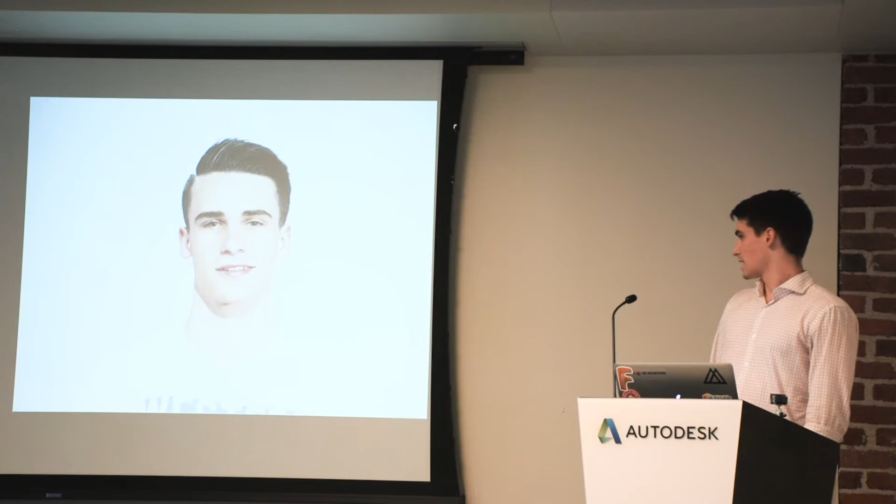Hey everyone, my name is Ben Lorimore, and I am currently a Fusion 360 intern at Autodesk up in Portland. I'm a rising sophomore at Western Washington University studying industrial design. Before I get into the Kickstarter, I just want to give you a little background of how I got to this point.

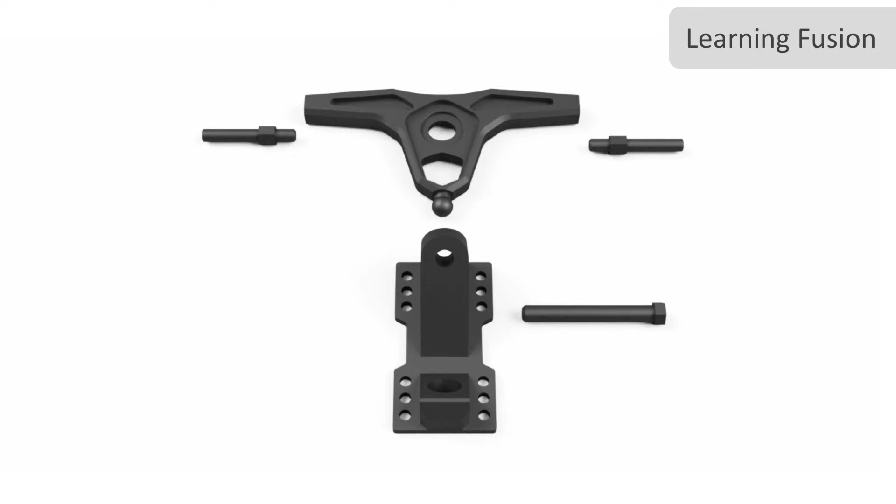I started using Fusion about halfway through my junior year of high school, and this is the first design I ever modeled. Anyone who uses Fusion can tell this is just a terrible model. For those who know CAD workflows, this is a bottom-up design, meaning I modeled all the parts on the plane and they're not connected. I didn't know how to use joints or any move commands, so that was the final stage for a while.

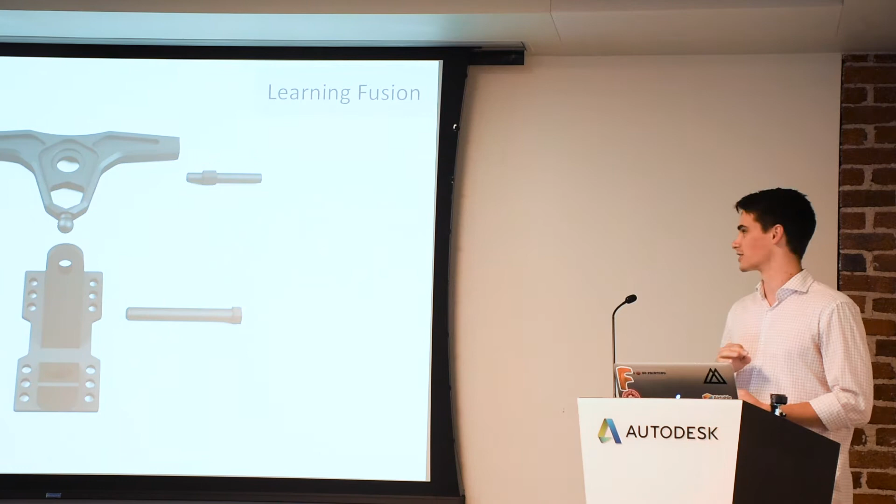I ended up 3D printing this, and since I didn't know how to measure anything—I was teaching myself CAD as I modeled this—none of the parts fit, because I used trigonometry to calculate and did some math wrong. It's funny, if I modeled this now it would probably take me 20 minutes and everything would be super precise and perfect, but this took me 3 months and it didn't even work. I ended up fixing it, and this is what the second 3D print turned out like, and this is a render of what it was supposed to look like the entire time.

My senior year of high school, I worked at this startup here in the Bay Area remotely called Orbis Wheels. Unfortunately I can't show any of my work because it's all non-disclosure. But during my time there, I gained a lot of experience, modeling in Fusion almost every day. I came in with still pretty beginner CAD knowledge and left feeling very confident in all solid body modeling and a lot of surface.

After my senior year, I really wanted some hands-on experience in a real industrial design internship. So I applied to a bunch of firms around Portland, and unfortunately I only heard back from one, which was Tarragon, a small soft goods firm. I stopped into Tarragon and spoke with the owner, Bill Dieter, and he said unfortunately they already filled their position, but they totally would have hired me if they hadn't.

He then gave me the best design advice anyone has ever given me, which is make something that you design. Up to this point, I'd drawn a bunch of my stuff and modeled it in Fusion extensively, and it's all constrained—like I can make it—but I'd never actually made it, besides a 3D print. A 3D print's cool, but it's not the same as actually having a real product in your hands. So I took this advice really seriously and began to brainstorm some things I could make.

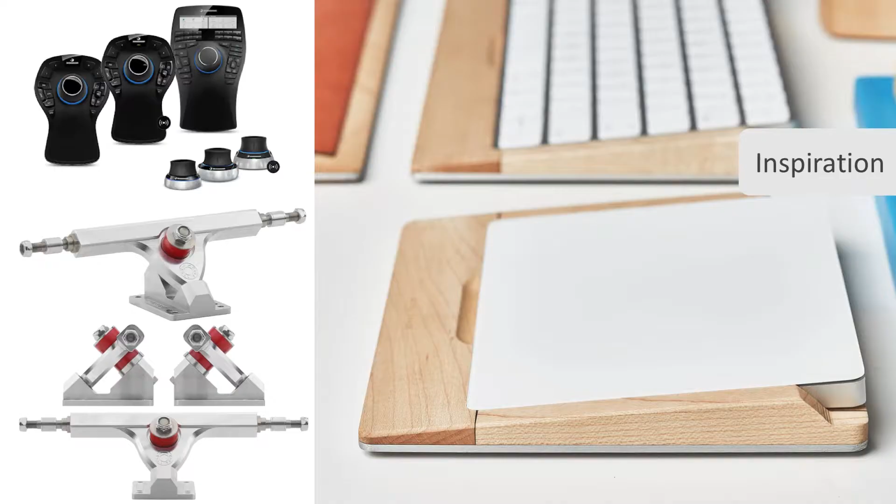It was funny because when I got the idea for the Space Cradle, it wasn't a logical ideation process—it just kind of hit me all at once. This is the inspiration for it. Obviously, the main inspiration comes from Grovemade. But I also use a 3D mouse every single time I use Fusion, and for those who don't know what a 3D mouse is, those are all 3D mice up in the top left corner.

And basically, it's not used to click at all. You can have some shortcuts programmed into it, but basically it's like a little knob and you use it to rotate, zoom, pan, all sorts of different commands. I think it speeds up my workflow like 200%. I can't even work in Fusion effectively without one anymore.

For those of you who work a lot in CAD, you know when you're working for like 5+ hours, you get really sore. So 3Dconnexion thought of that, and they made nicer ones, the top ones that have built-in hand rests and stuff, and a bunch of buttons for shortcuts, but those go for like $350 a piece. I have one of the ones down there which go for like $100, which I think is a good deal.

And the ones down there have a couple buttons, but I never use them at all. I wanted a hand rest so it could be more ergonomic, but I didn't even use the buttons. So I didn't really think it was worth spending like $200 for a hand rest when I was really paying for the buttons that I wouldn't even use.

And then right here, this is my last source of inspiration, which is Caliber longboard trucks. I used to longboard a lot. You'll see when I show you the design of the Space Cradle, but I really love the kind of curvy chamfers on that. This is CNC'd out of aluminum, and I just think the precision of those curves is really nice.

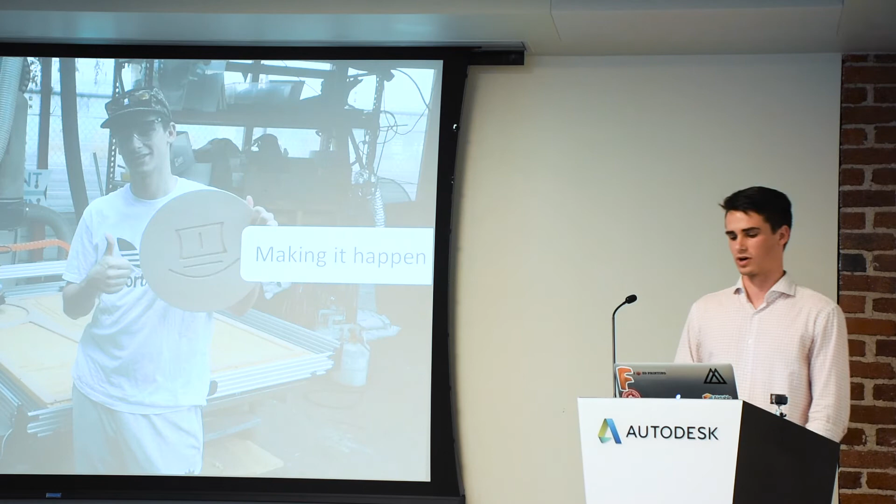And that's where Fusion really shined, I think. I was able to go into Fusion with no CAM or CNC experience whatsoever and basically teach myself everything. And as you'll see with the final results, I think it turned out pretty well. So I think that was really cool. It was really just easy to look at the little pop-ups and kind of find out what I needed to know.

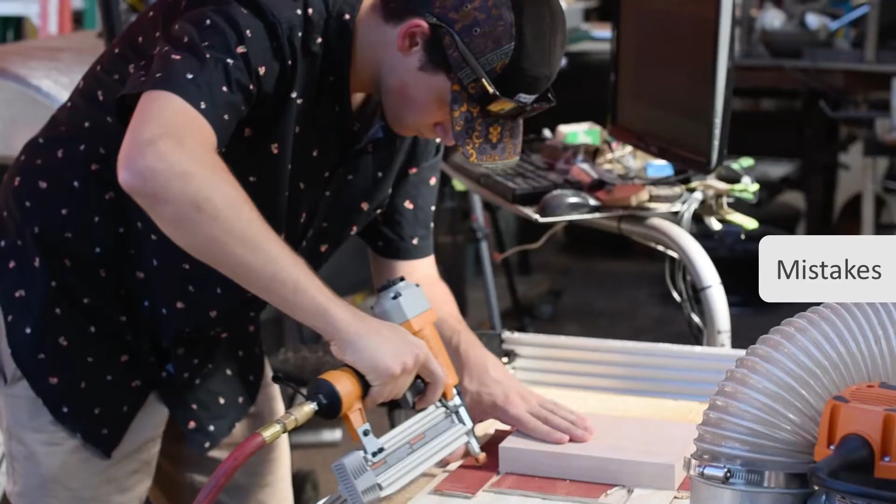With any workflow, I had some problems and mistakes that I could go back and change immediately. I think everyone with a real project will run into problems, but mine could have been avoided. My main mistake was trying to do everything at once - I'd never used CAM, never CNC'd, never made a product before, and I was trying to do all three plus launch a Kickstarter at the same time. If I did these in steps, I would have been more successful and less stressed. So to anyone thinking about doing something like this: do it in steps, it'll make it a lot easier.

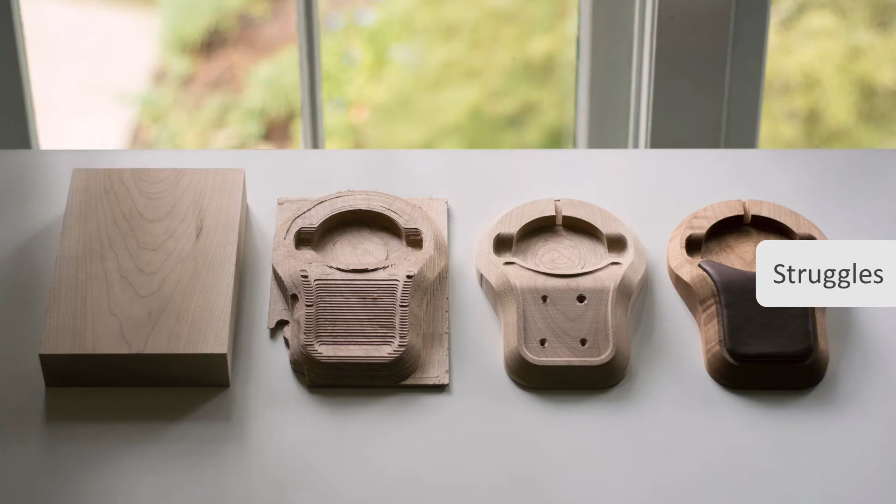I ran into two major problems. The first wasn't really related to making the Space Cradle itself. When I went to the makerspace, they told me the CNC had 3 inches of Z travel, meaning the bit can go up and down 3 inches. I thought, that's great, since the Space Cradle needed about 2.5 inches of Z. But once I drew up all the CAM and went to the CNC, I got error message after error message. I looked into it and found out it actually only had 2 inches of Z. I thought, well, I can't make this, I don't know what to do. But this ended up being really satisfying.

I found out the CNC was actually open source, so I found the Z plates online, pulled them into Fusion, added another inch, whipped up some CAM, got aluminum plates, and drilled it all out on the CNC itself. So I was modifying the CNC with itself, kind of like the self-replicating 3D printers, and I thought that was pretty cool.

Did you charge your makerspace for the upgrade? No. Did they give you a free month at least? I think I broke some of their bits, so it's kind of a trade-off.

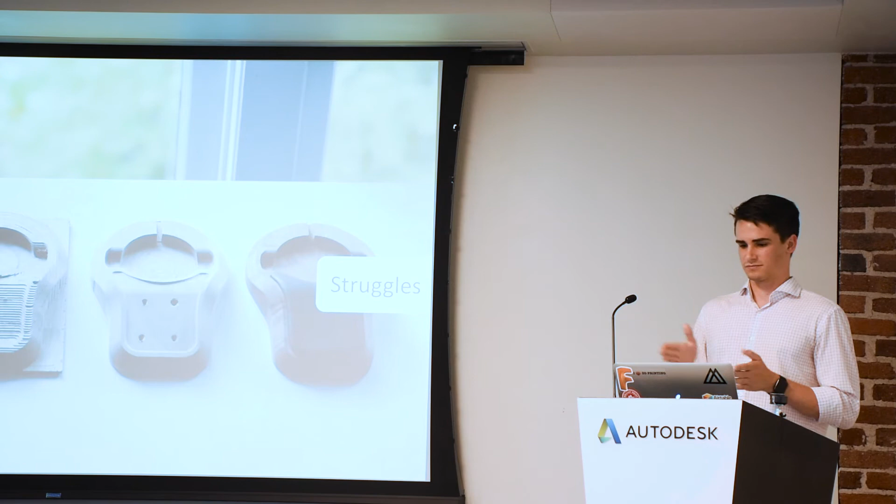The big problem I ran into with the Space Cradle itself was fixtures. I don't know how much CAM experience you guys have, but if you don't have any CNC experience, fixtures can be a really big problem, especially with a complex cut like this. The people at the makerspace were mainly cutting out just 2D stuff, so they could put bolts on the side and avoid the issue. But as you can see, that's the stock I start with on the left, and these are the steps to the final product. You can see I cut away the entire stock, so I can't just put a bolt in there because that's not going to work. I did a couple different things that were really hard and ended up not working, until at the very end I figured out I could just drill them in from the bottom. I never thought of that.

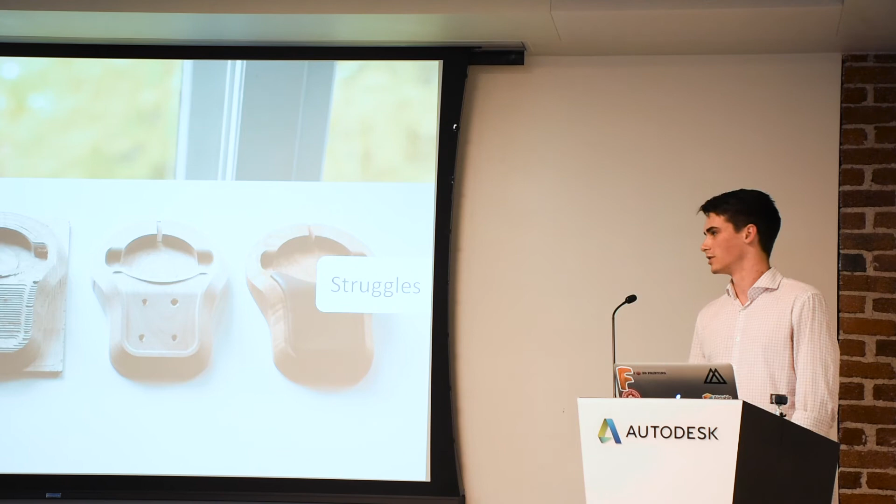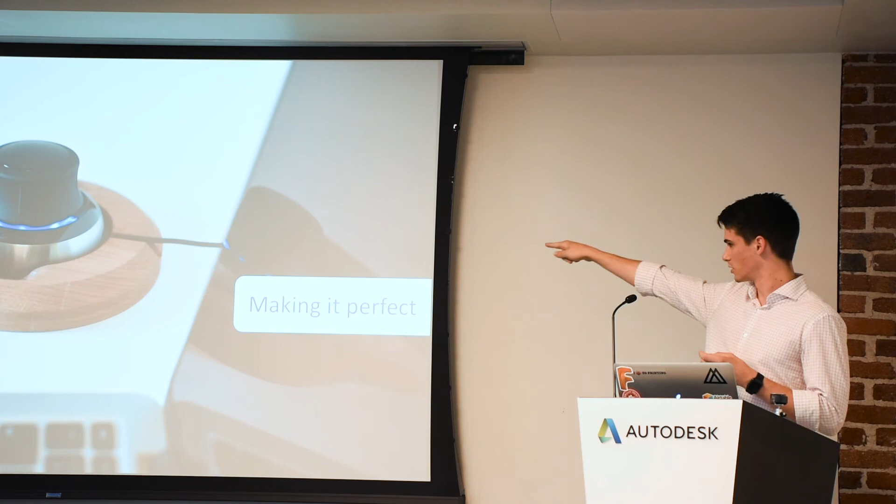Perfecting my toolpaths also took a lot of time - I think I went through 4 different iterations before it even looked good. But it was super nice because whenever I needed to make a change, I could just go into Fusion and change some geometry. For example, I needed to change the wire pocket because they didn't have the tool I thought they had, so I just went into Fusion, changed it, and all the CAM updated automatically. That was super nice.

Something I think is super important for any crowdfunding campaign is building a movement behind your product. This is something I was doing the entire time, even from the very beginning of the prototyping stage. I spent a lot of time on Instagram - I created an account for it and was on it basically every day, posting pictures of my process, reaching out to people, and building connections. I also spent some time on Reddit and Facebook. This was definitely the most important part of my entire campaign - it would not have happened if I hadn't gone on social media.

It was really nice planning what I was gonna do during my campaign once I launched. I put together a list of all the pictures I wanted to post on social media, dates with those, maybe some captions. It was really helpful because it can get stressful when people are reaching out to you and you can forget to post, since I was posting every day once I launched to keep shouting out my product so people see it.

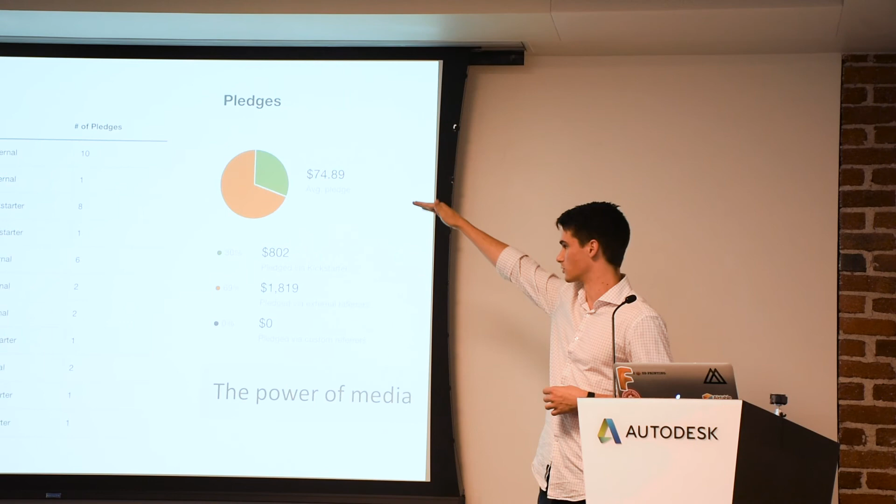Just to prove my point that social media is super important, 69% of my entire funding was through sites that were not Kickstarter, which means I posted a link on my Instagram profile, Facebook, Reddit, whatever, and you can see where all the referrers are.

Also, I reached out to a lot of blogs and got featured on Core77, which was really cool. It's important to just reach out, and a lot of design blogs will actually feature you. I'm really young, and I didn't think it was that good of a product looking back honestly, but people like to feature your stuff.

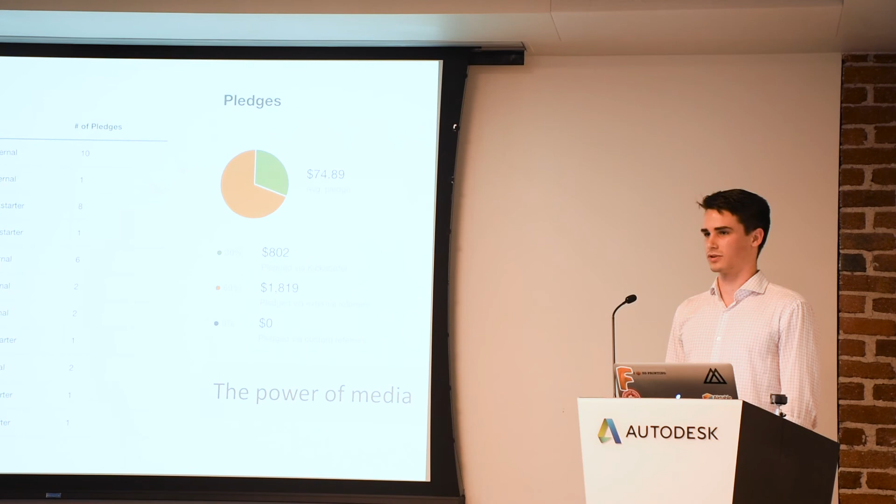A huge thing I did not stress the importance of when planning my project is calculating a massive funding cushion. I calculated about $400 extra, so my goal had $400 I could pocket. But I came close to not even breaking even because there are a lot of costs you don't even think of, like buying screws or safety glasses. Once you buy 30 of those things it gets expensive fast, and the last thing you want is to launch a Kickstarter, fund it, and have to pay out of pocket to fulfill your backers. I came really close to doing that.

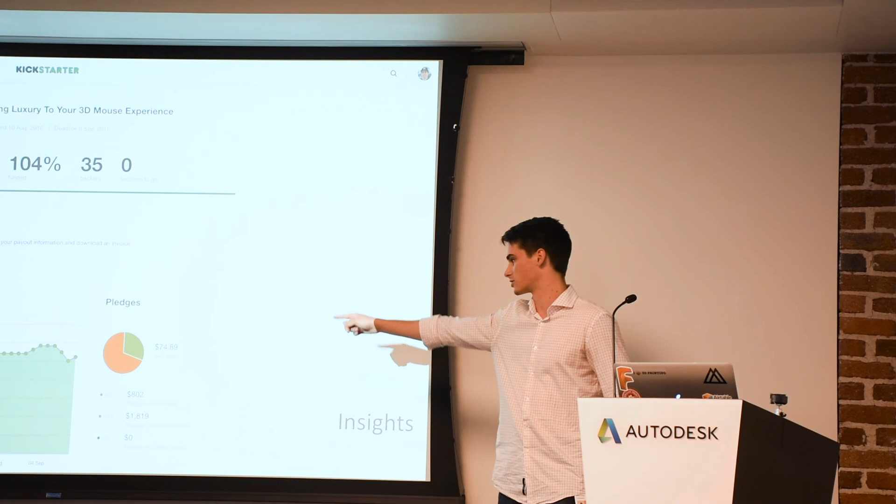Also, a huge thing I had no idea was even a thing with crowdfunding is that people drop out, and that was really scary. My campaign almost got canceled — in the last few days I lost like 5 backers, hundreds of dollars. So that's a good thing to keep in mind, that people can drop out whenever they want.

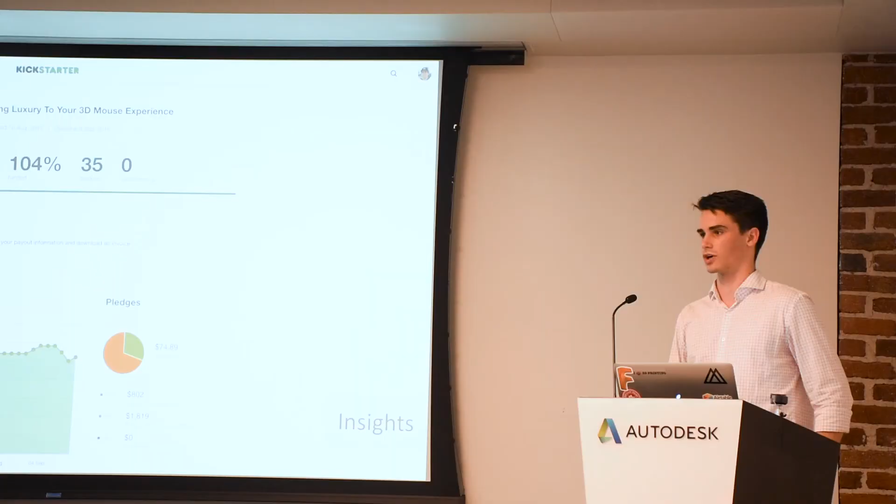I want to end off with what I think is the most important part of running something like this on the side: just have fun. The greatest part of this for me was designing a product, manufacturing it myself, and knowing people all over the world were buying it — I had people in Germany, Switzerland. It's a really cool thing to do, and you shouldn't forget that. Funny story, it was apparently the reason I got this job.